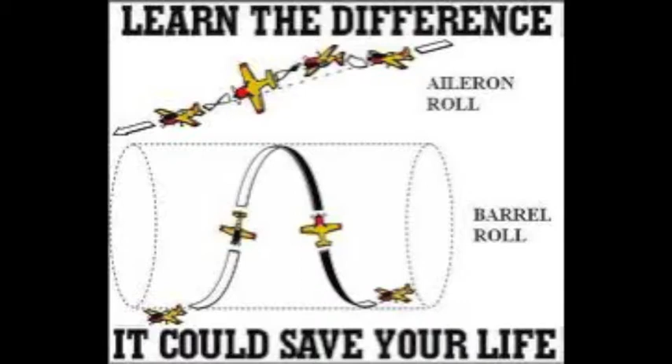Like a lot of pilots before us, our initial air combat tactics training in the F-4C was a 2-week, 10-sortie flight course designed only to give the basics before going to Southeast Asia. The co-pilots and navigators only flew on 6 of those training sorties.

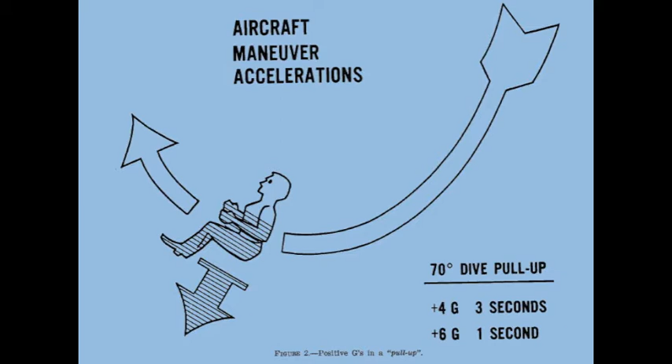In July 1967, I was sent to the 558 TAC Fighter Squadron, Cam Ranh Bay Air Base, South Vietnam. I flew 152 combat missions, with 30 of those up north in Route Pac 1 next to the DMZ. In the last week of January 1968, North Korea captured the USS Pueblo. My squadron was sent to Korea on February 4th to provide combat support to the South Koreans. I finished my 1-year combat tour of duty in Southeast Asia in July 1968.

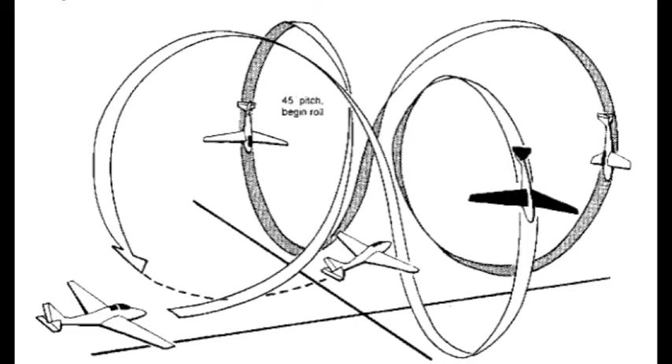When I returned to the United States from Vietnam, I was assigned to the 49th TAC Fighter Wing, Holloman Air Force Base, New Mexico. It was being reformed after a long tour of duty at Spangdahlem Air Base, Germany. I signed on board August 1st, 1968, and met a Major Tom Stolley from the 9th TAC Fighter Squadron. He was the only other officer there at the time. He was keeping things running administratively while everyone else was en route.

He handed me a list of the Vietnam pilots that were coming to Holloman to reform the wing, asking me if I knew any of the Vietnam returnees. We proceeded to divide up the incoming personnel to their separate squadrons. There was a settling in process of a couple of months while everyone was figuring out where they were and what they were supposed to be doing.

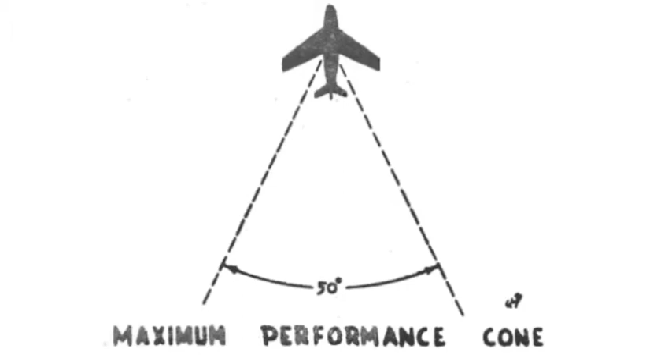In mid-October, Mike Ryan called his older brother Jack and asked for a meeting. Jack and Mike were both sons of General John D. Ryan, who later became Chief of Staff of the Air Force. Jack, my aircraft commander, asked me to join in. Mike had also brought his backseater with him into the discussion. Currently, he was a navigator who had transferred from Europe with the 49th.

Mike started the discussion with concern about how many aircrew members were being killed in Vietnam. We discussed the current kill ratios of 3-to-1 over North Vietnam as compared to 10-to-1 in World War II and Korea. It was bad. The new guys were being shot down before they had enough experience to know what to do. The basics were not enough. We were losing air crews at an enormous rate over North Vietnam.

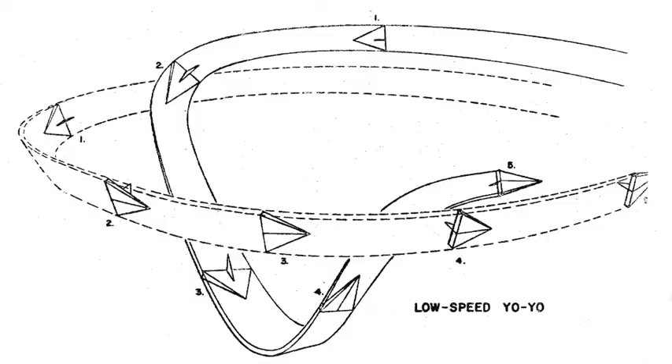The consensus among the 4 of us was that something needed to be done. There was a short moment of silence while we gathered our thoughts. Training, Jack and I both said, standing at the same time, realizing how simple the solution really was. Jack started talking about a training program to help pilots recognize the hazards of flying over North Vietnam and how it would improve their survivability.

Jack knew that the wing squadron weapons officers were in the building at the time and sent me out to get them. It took me just a moment to get Joe Dryden and Pete Schmidt to join our conversation. They were in the navigation room planning a practice low-level mission. Jack explained the situation to Joe and Pete and about the training idea. Then he pointed to each of us and asked, "Do you agree that there should be an improved air combat tactics training program locally for the guys who hadn't been to Vietnam?"

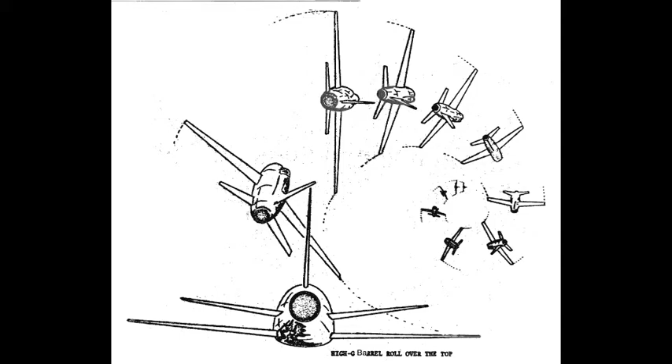Each of us agreed that the air crews had to be continually trained, and that the air combat tactics program that we received in RTU needed to be rewritten and updated. The tactics had changed considerably since World War II and Korea. The weapons officers, Joe Dryden and Pete Schmidt, were appointed to write the training syllabus for the air-to-air combat training programs. Our group of captains consisted of 4 aircraft commanders and 2 backseaters.

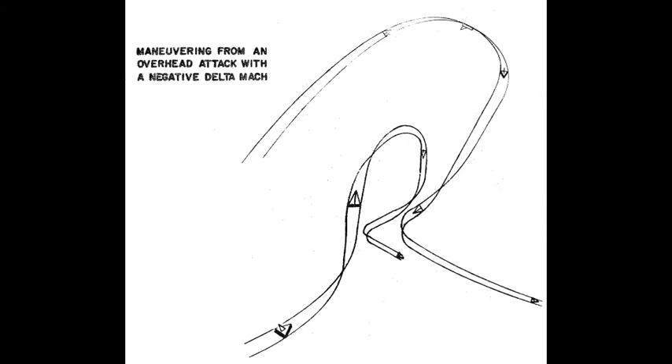3 had been to Southeast Asia, and 3 had come from Europe. We all knew the war was going to last a while longer, and the kill ratios were terrible. The veterans wanted to pass along our experiences to others who might go to Vietnam. When the 20-minute meeting was over, a sixth sense of insight told me that something very important had just happened.

It would have a huge impact on pilots from this point onward. Joe and Pete wrote the syllabus for 29 training sorties and submitted the program for approval. The wing commander approved the syllabus within 2 weeks. We started training in November.

Meanwhile, the Navy had already decided to start a program to train their pilots in the fine art of air combat tactics. They called it Top Gun. They were looking around for a program that had already been developed when they ran across ours. They asked if they could fly with us for a week to see if our program would meet their requirements.

The next week, we left for 2.5 months of temporary duty at Spangdahlem Air Base, Germany. It was the first Crested Cap 1 Reforger exercises. The Navy took to the syllabus like a duck takes to water. They added 2 sorties, raising the sortie count to 31, and started using it in their Top Gun school.

About 45 days later, the Air Force Fighter Weapons School at Nellis Air Force Base heard about the Navy's Top Gun program and asked them where they got it. The Navy told them that they had gotten it from one of the Air Force's own units, the 49th TAC Fighter Wing at Holloman. The Air Force then adopted the program and called it Red Flag, a competition for the best.

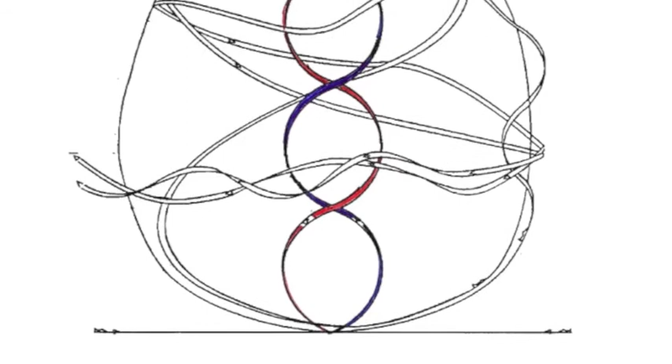There are many ways to attack your target, and this is only one of them. Some constraints are the abilities of pilots and their physical limitations, your aircraft limitations and capabilities, differences between fighters, and weapon systems limitations. A pilot can experience tremendous forces of gravity or G-forces in a dogfight. I've personally seen the G-meter pegged at 10 Gs. Gs are negatively correlated with time. The higher the G-force, the less time a pilot can spend in those conditions.

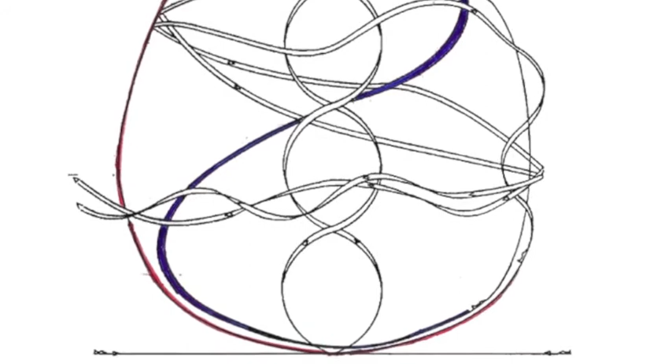As a comparison, a 60-degree bank level turn is only 2 Gs. Most aerobatic, over-the-top maneuvers like a loop require 4 Gs to complete. A pilot's G-suit only allows a 2G advantage. A pilot must fly his aircraft at its limits. Anything less and he could lose the fight. The F-4C was limited to 7.5 Gs with fuel in the wing tanks and 8.5 Gs with internal fuel only.

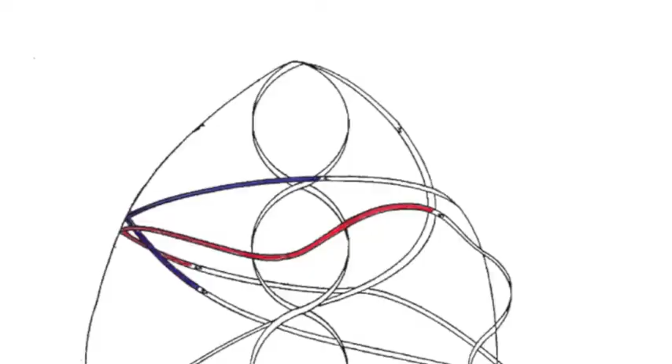The F-4C internal fuel was 12,500 pounds, but full afterburner burned it at 36,000 pounds per hour. That's only about 20 minutes of dogfighting time, and you still have to get home. Any aircraft near a stall or at high angles of attack becomes a rudder-controlled aircraft for best roll rate. Many jet pilots forget this because of the lack of engine and propeller torque.

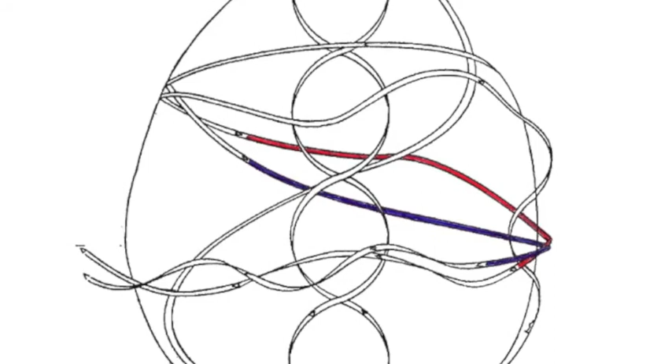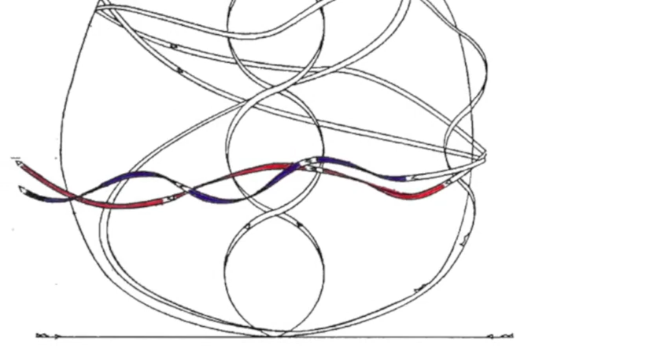The differences between fighters can make a huge difference on the outcome of the dogfight. Just because your enemy is not supersonic and you are doesn't mean you will win. He can turn faster and get his weapons pointed at you before you can get set up in a firing solution. Weapons have their limitations too. Missiles are fast and are considered long-range attack systems out of gun range, but are severely G-limited.

Radar missiles are used in a frontal or rear attack. Heat-seeking missiles are used primarily in the rear. The Gatling gun is a close-quarter system from any attack angle, but is severely airspeed limited to less than Mach 1.2, or you'll eat your own bullets. The pilot must keep all of these factors and limitations in mind as he sets up his attack.

Since you can't feel the G-forces or get the sensations of glancing over your shoulder to see what your enemy is doing, I provided distractions while showing the ACT drawings in the background. Today, this is called multitasking. Pause this movie after the red signboard or wait about another 30 seconds until the end for a longer look at the dogfight diagram. Thank you and enjoy your flight.